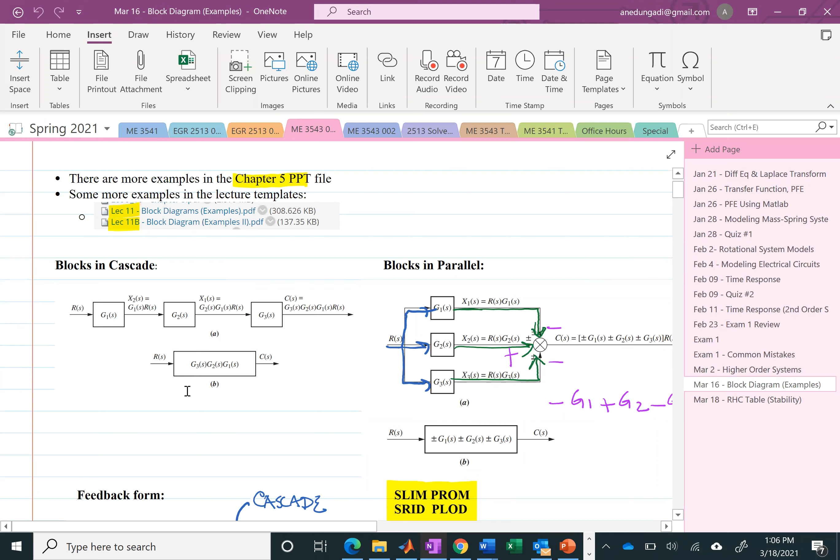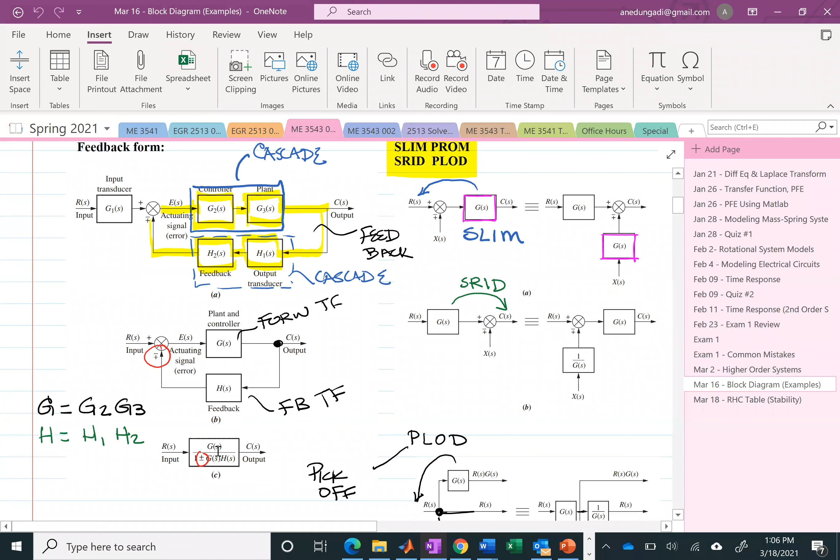We determined the equivalent transfer function of that multi-block system, right? That's what we did. If you look at the examples that we did last class, if you have these multiple blocks, then the equivalent transfer function is this. If you have multiple blocks arranged in this form, then the equivalent transfer function is that. So what does that do for you? From the multiple blocks, you get one total transfer function. That's why we called it the total transfer function, T.

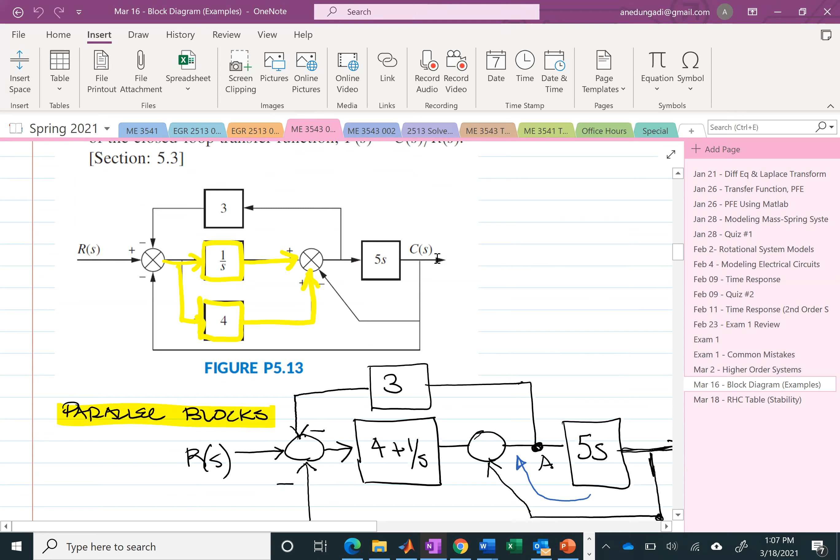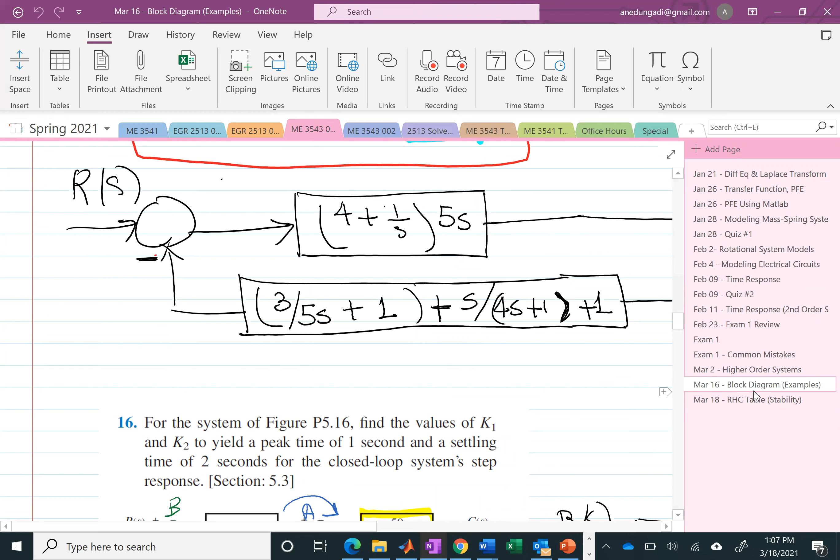Again, this is multiple blocks, right? You have a transfer function, then you have the unity feedback. That's also a transfer function. And we determined the equivalent transfer function by moving blocks or recognizing one of the three: cascade, parallel, feedback, and then determined our total transfer function. So this total transfer function is the equivalent of this multi-block transfer function. Everybody sees that? Here we were able to determine a total transfer function between the input R and the output C. That's going to be important for the next chapter, which is stability.

Now, let me just say this. The stability of a physical system, of a dynamic system: if we have a static system, that static system is not moving, so there's no question about stability. Stability only comes in when you have a dynamic system. And when you put an input into that dynamic system, if its output is stable, then you have a stable system.

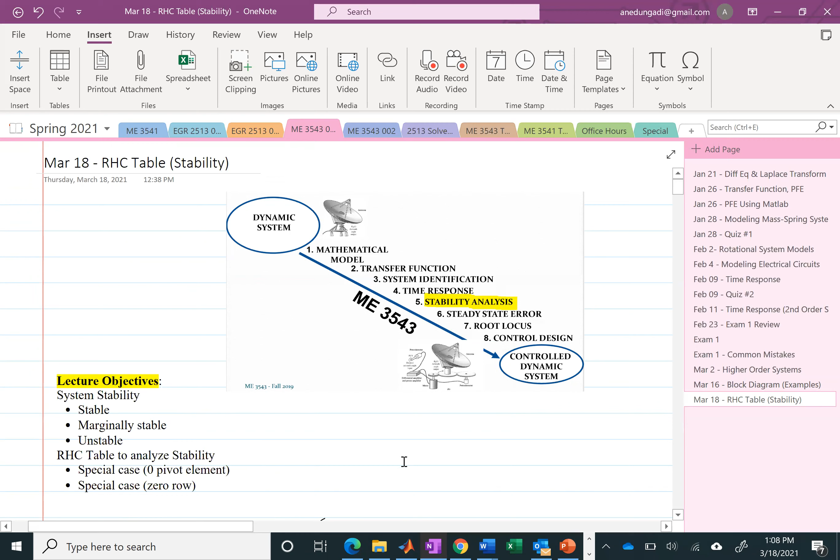Stability comes in three flavors: stable, marginally stable, and unstable. What does stable mean? Let me show you this physical representation of stable. This is asymptotically stable. I'll get to stable in a minute, but let me define stable as this.

Stable would be, let's say we have a surface and we have a car, and then someone puts a force on that car. That force can come from the engines, or it could be coming from multiple people pushing the car. But what happens is that car will move from its initial state and it will go to a different state, right? Different position. And it will just stay there, right? So it goes from position 1 to position 2. So this is what I would call stable.

Okay. Now, what happens if, instead of a level plane, I were to tilt this ground? And then again, the same car, you push it for a certain amount of time, and it goes to a different location. Now, when you take the force away, what happens to the car? It's going to roll down. So that's an unstable state. Okay. So that's the concept of stable and unstable.

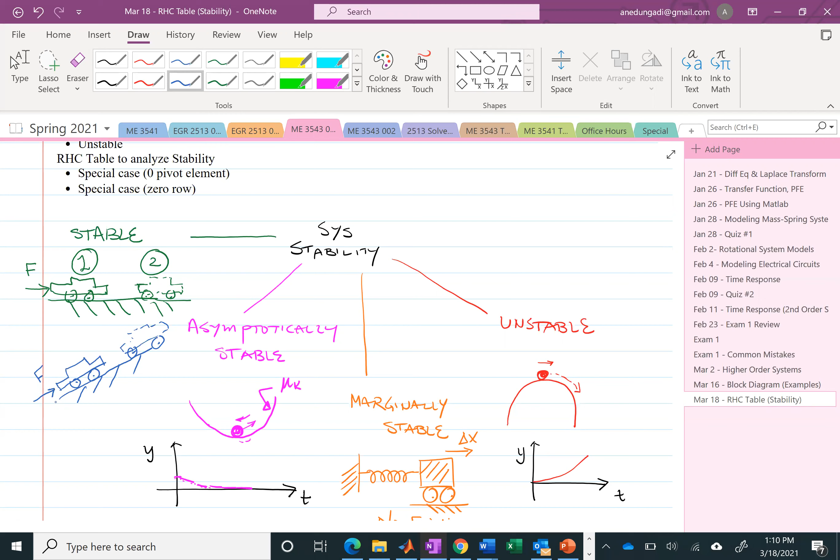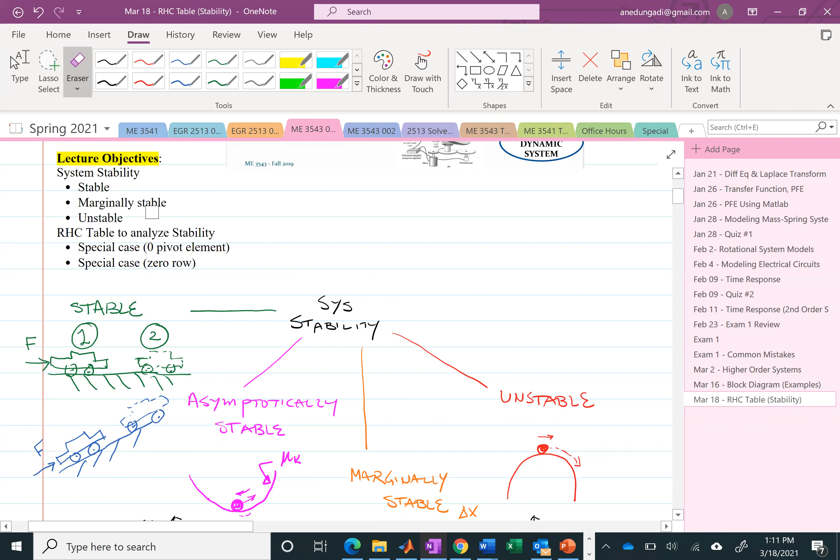Now, what I've done for you is I've basically taken these three flavors of stability: stable, marginally stable, and unstable. These are the three flavors that we're going to be studying in this chapter. So unstable is what we just talked about, or if you look at an inverted trough, and you have a little marble or a little sphere at the top of this trough, if you didn't do anything to that sphere, it would just stay there forever, right? It would be stable and stay there forever. However, if you perturb the position of this object by an infinitesimal small amount, what's going to happen? It will never return to its original state. It will just basically run away. Exactly like this thing here. If you leave the car here and take the forces away, this car is going to roll down.

So that's unstable. Marginally stable is if you have a constant oscillation of the system once you apply a force to it. So if you have a mass spring system, what happens to that mass if you apply a force F and compress the spring and let that force go away? What happens to that mass? Let's assume there's no friction. So you compress that spring for a certain amount, and then you let that mass go. What happens to that mass, do you think? Exactly. It's going to oscillate forever. Exactly right. Oscillate in a sinusoidal manner. It's going to oscillate forever. So that's what we call marginally stable.

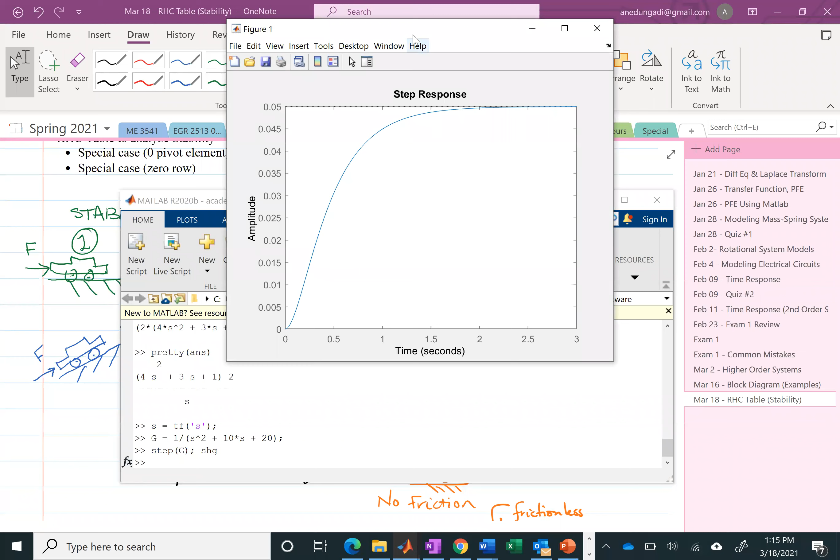Okay. So let me show you what it looks like in a simulation. Okay. So let's say the transfer function. I'm going to say S is equal to TF of S. I'm going to say the transfer function G is 1 divided by S squared plus 10S plus, I don't know, I'm just completely making this up, 20. Second order transfer function, if I put a step input into this transfer function G, what do I get? Okay, there you go. So put a step function into it, and it basically goes to a different location, just like your car, right? You pushed on this car and it went to a different location, and it just stays there.

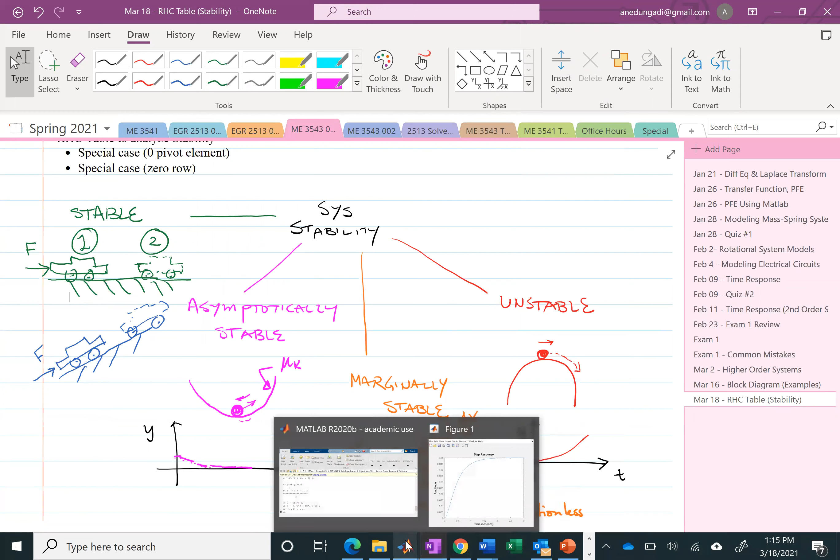Now, what happens if I say G, a different transfer function, 1 divided by S squared plus 20. So I'm basically removing the damping, making this no friction. Hold on, grid. Now, what do you think will happen if I were to put a step input into it? Aha, it just oscillates forever, right? Let's zoom in a little bit.

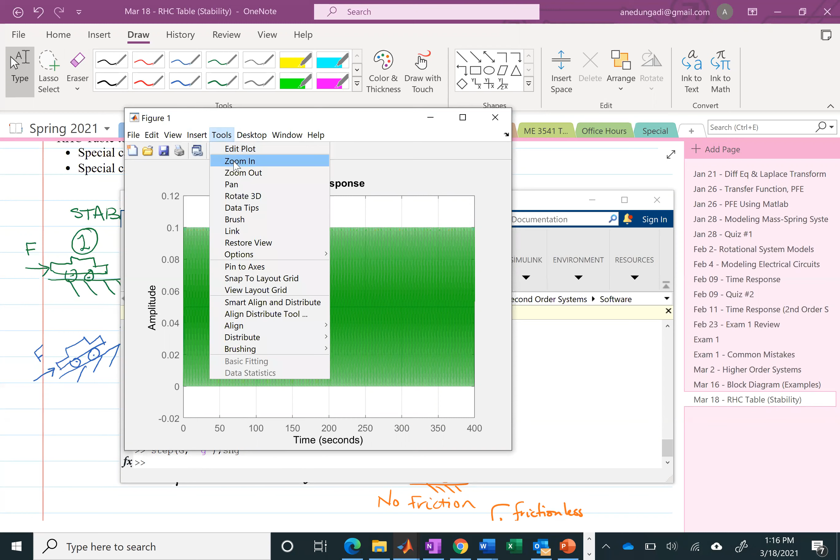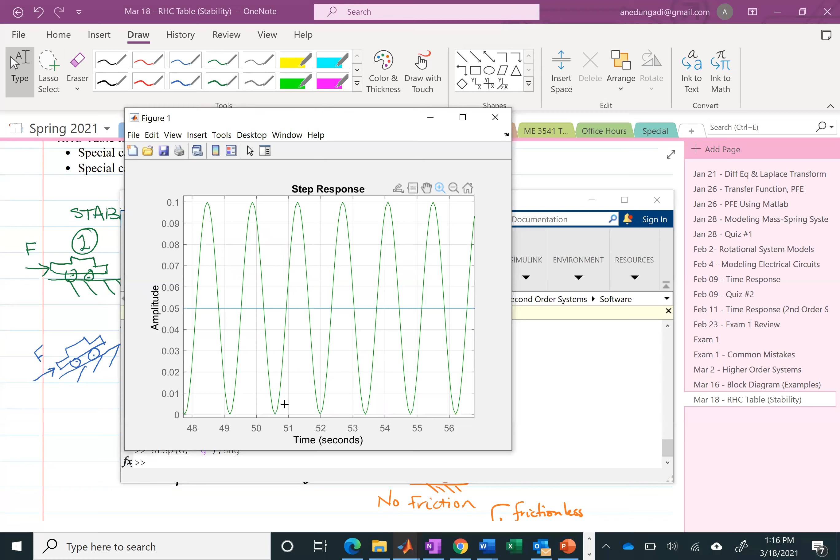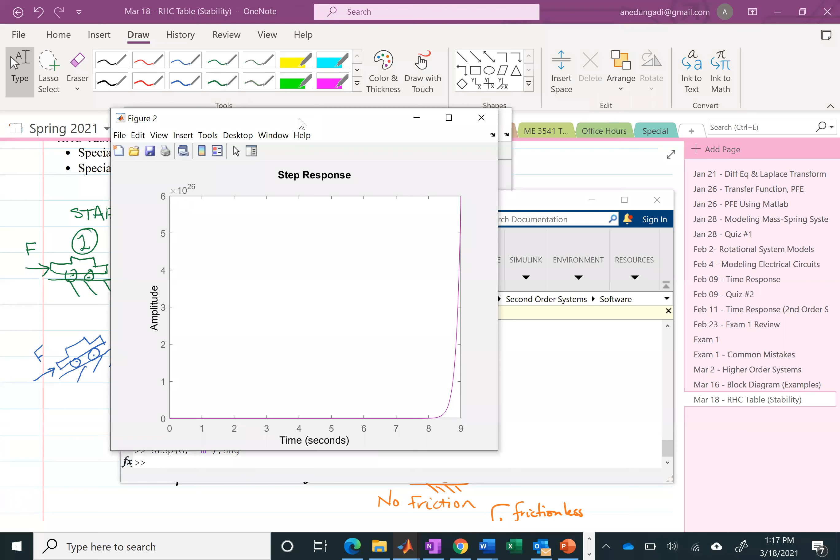There, it's oscillating forever. So that's a marginally stable system. And an unstable system, make this negative. New figure, step G, make that magenta. Aha, you see what happened? The system goes to infinity. Basically, it has run away. So that's an unstable system.

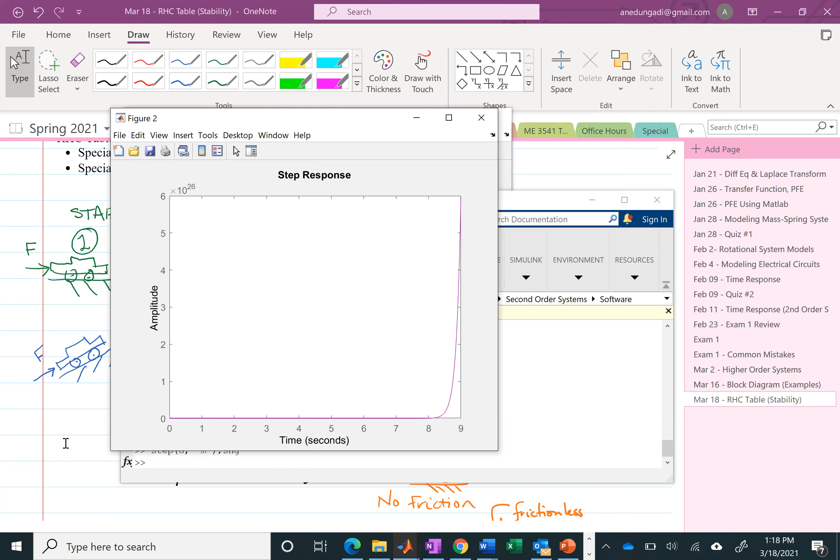So if you put a bounded input, a step input, into the system, and if the output is bounded, then we have a bounded input, bounded output, stable system. If you put a bounded input into a system and the system basically runs away, meaning the output of the system goes to plus or minus infinity, then we have an unstable system. Okay, so now I want to give you the tool to determine stability. How do you determine stability? If I have the transfer function, does anybody remember what characteristic of the transfer function indicates stability?

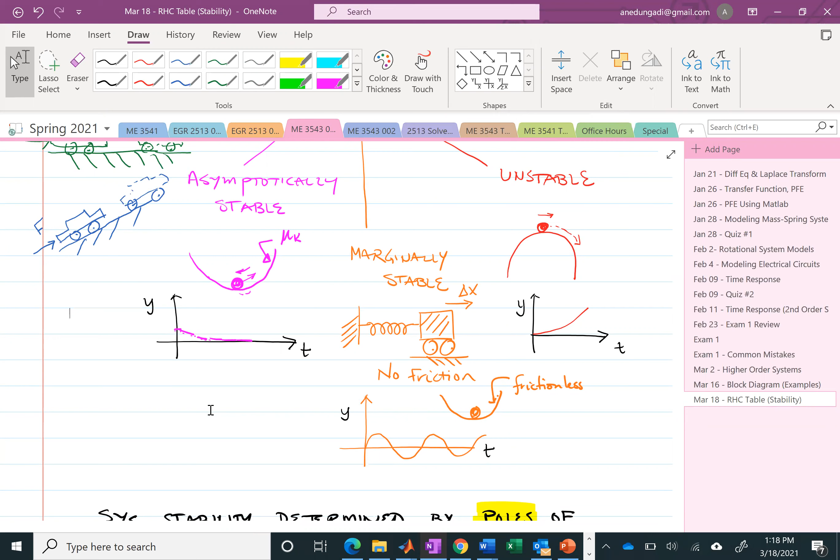So the system stability is determined by the poles of the total transfer function. Not the forward transfer function, not the feedback transfer function, but the total transfer function. So the poles of the transfer function, what are the poles of a transfer function? Anybody know what the poles of a transfer function are? We did this for exam 1. The roots of what, Tony? There is a numerator and there's a denominator. The roots of what? Exactly, the roots of the denominator. What are the roots of the numerator? Those are the zeros, exactly. So the poles of the total transfer function. So remember, please, it's the total equivalent transfer function.

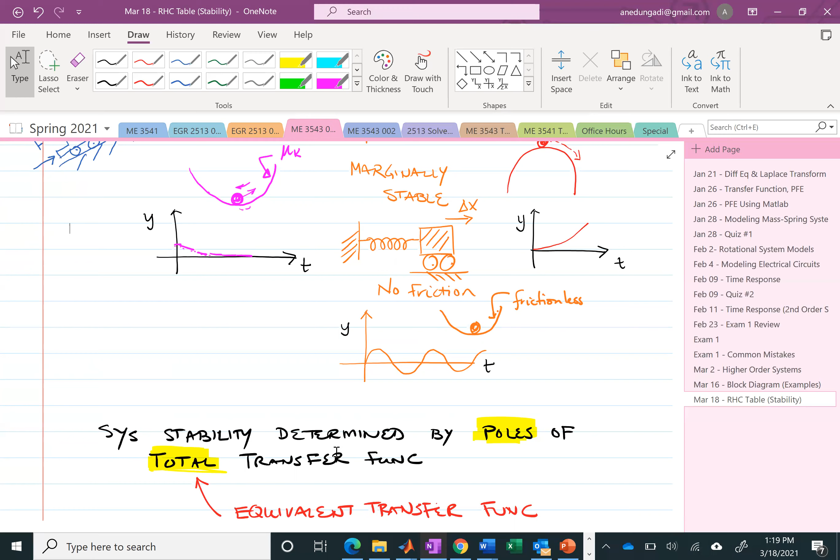That will determine if you have an unstable system, a marginally stable system, or a stable system. So if all the poles are on the left-hand side of the s-plane, then you have a stable system. If you have a pair of poles on the imaginary axis, you have a marginally stable system. And if you have any pole on the right-hand side, that becomes an unstable system. So the rightmost pole determines the system stability. In other words, you can have a million poles on the left-hand side, and if you have a single pole on the right-hand side, that single pole will determine the stability of the system.

You can have a million poles on the left-hand side, but if you have two poles on the imaginary axis, then those are the two rightmost poles, and they make the system marginally stable. And again, you can have a million poles on the left. If you have a single pole on the right, that makes the system unstable. Okay, so let's look at our example again. Remember, the original example was this, right? And when I did a step input, was that stable or unstable? Do you remember? It was stable. Exactly right.

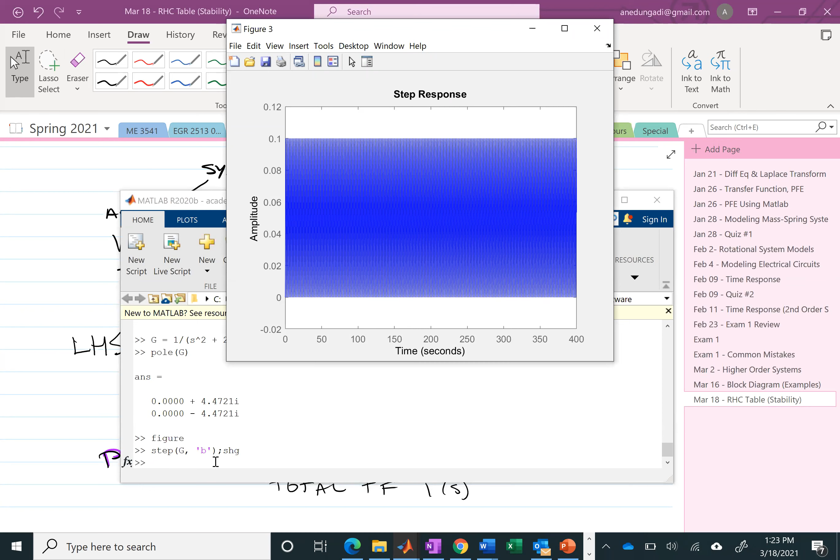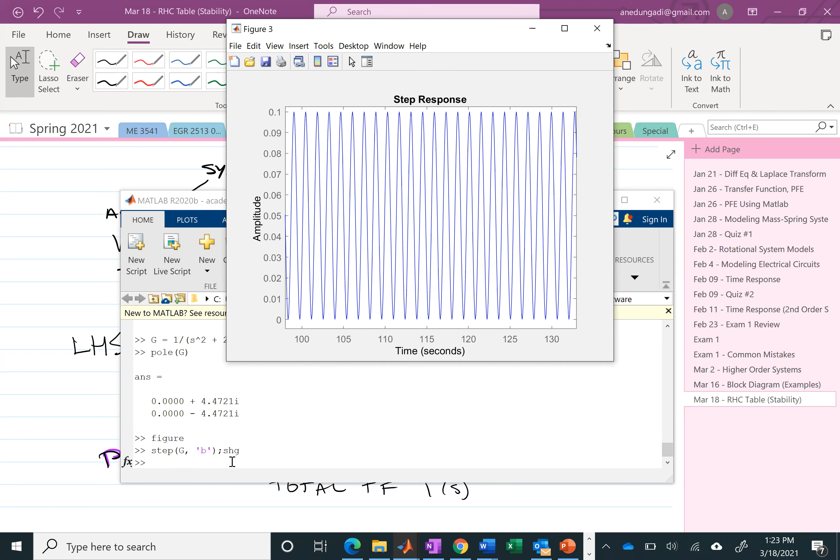It was stable. And how do I know that? Well, if I say G is equal to that, let me just do the pole of G. Okay, so the poles of G are at negative 7.2 and negative 2.76. So the poles are on the left-hand s-plane, and therefore the system is stable. What about G being this? The poles are on the imaginary axis. And you remember what happened when I put a step input into this transfer function? Figure, step G, make that blue. Oscillations, right? And the poles of that transfer function are on the pure imaginary axis.

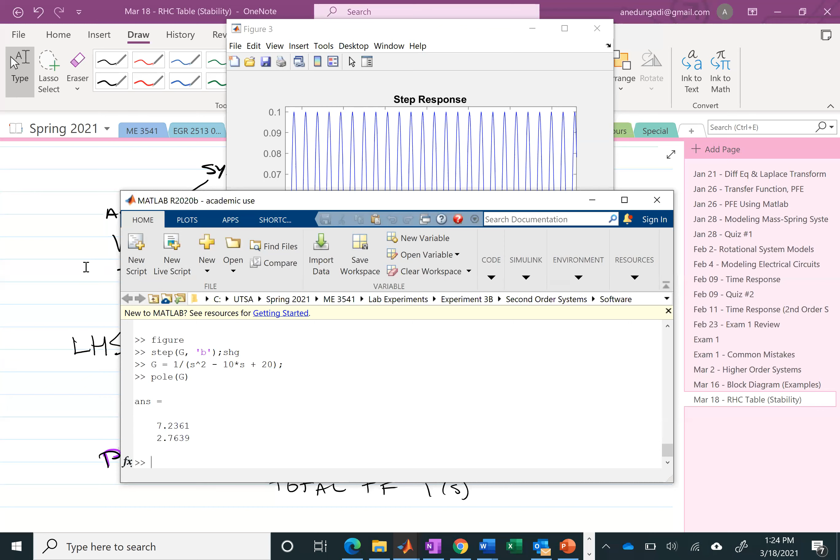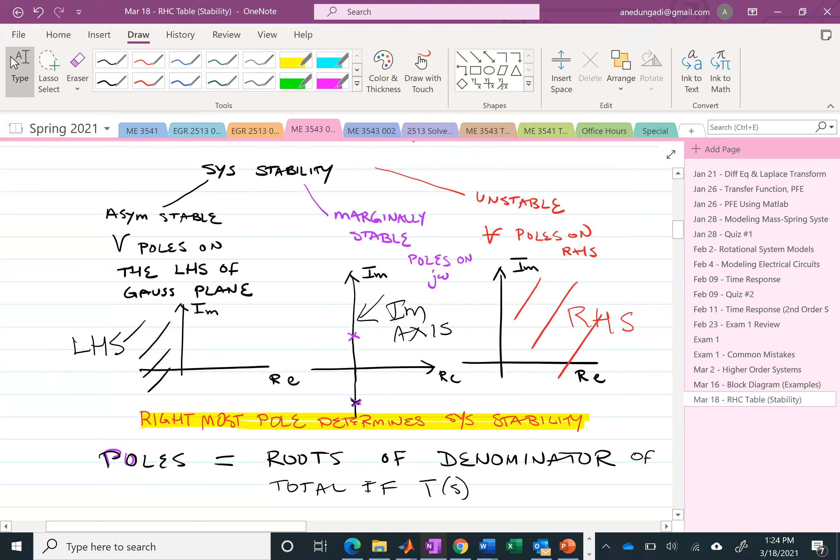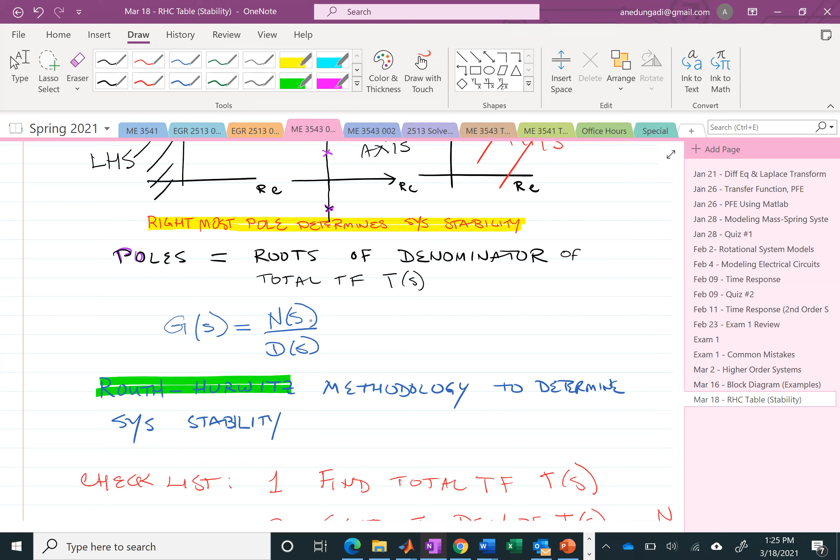And then we looked at this transfer function, right? No, this one. What was this? Stable, marginally stable, or unstable? Well, let's look at the pole of G. Positive and positive. So that means two positive poles makes it unstable. Okay, so the poles are the roots of the denominator of the total transfer function. So the roots of the denominator of the total transfer function determine the stability of the system. Now, roots means you have to solve for the roots of the denominator, right? So remember, G of s is numerator over denominator. So the roots of the denominator tell you whether you have a stable system, a marginally stable system, or an unstable system. Again, please remember this.

Stable system, all the roots are to the left of the imaginary axis. Marginally stable system, you have poles on the imaginary axis. You can have two or more poles on the imaginary axis. And unstable means that you have at least one pole on the right-hand side. Remember, the rightmost pole determines the system stability. Okay, so what happens if this is complicated? Let's say this is 1 divided by, let's look at the example that we're going to do. Let's say this is 1 divided by s to the power of 4 plus 3s cubed plus 2s squared plus 4.

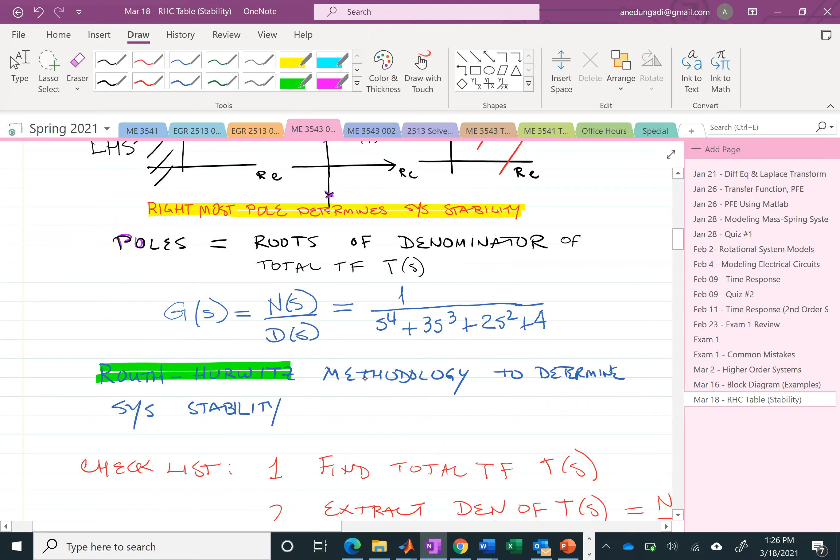So you cannot manually calculate the poles of this fourth order transfer function, right? You would need MATLAB or some other analytical tool to calculate the poles of the transfer function. So instead of calculating the poles of the transfer function, there is a method called the Routh-Hurwitz method to determine system stability. And let me show you how that works. So for the Routh-Hurwitz method, here's my checklist. Always first find the total transfer function.

Now, what is finding the total transfer function? It's what we did in chapter 5. So you have a multi-block system. You have to determine the total equivalent transfer function. Once you have the total transfer function, extract the denominator of the total transfer function. Write out the denominator without any vanishing exponents on S. I'll explain that in a minute. And then create the RHC table.

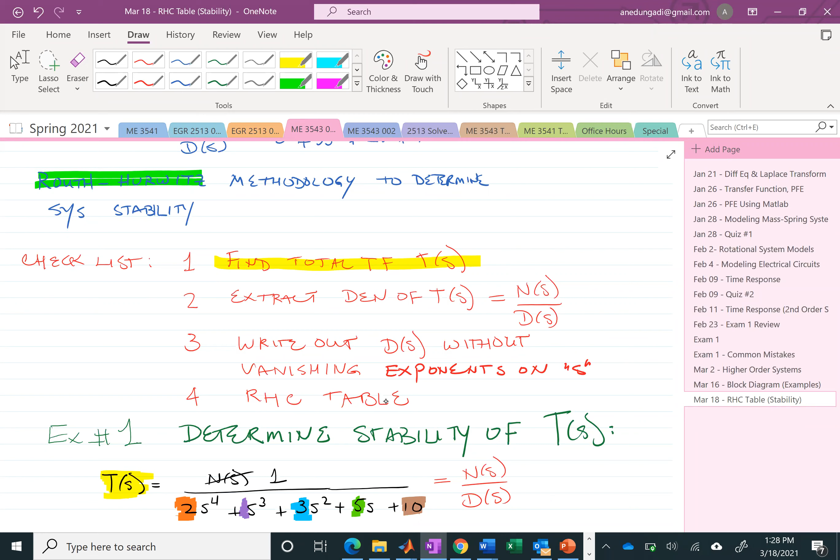The RHC table will tell you whether you have a marginally stable system, an unstable system, or a stable system. So stable, unstable, and marginally stable. That's what the RHC table will tell you. Okay, so let's look at an example.

1 over this polynomial that we have at the bottom. A fourth order polynomial, so practically impossible to determine the roots of that polynomial. Usually anything higher than 2, it's very difficult to determine the roots. So how does this RHC table work?

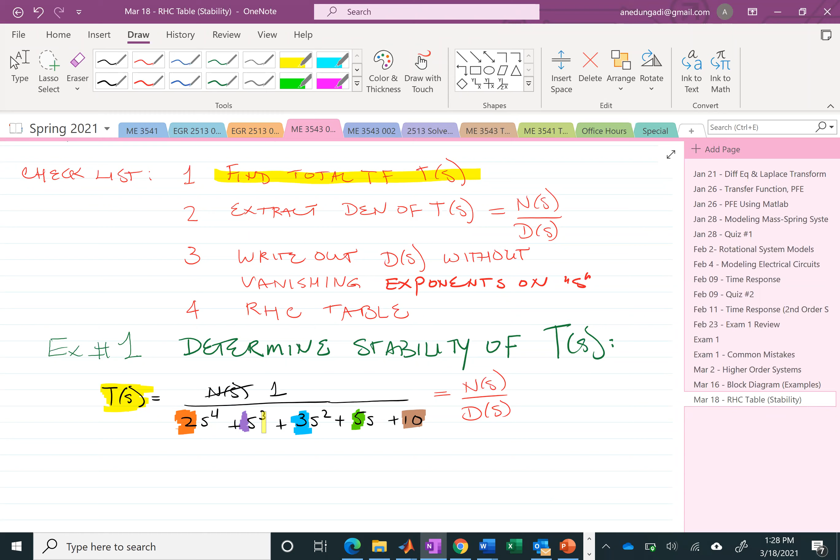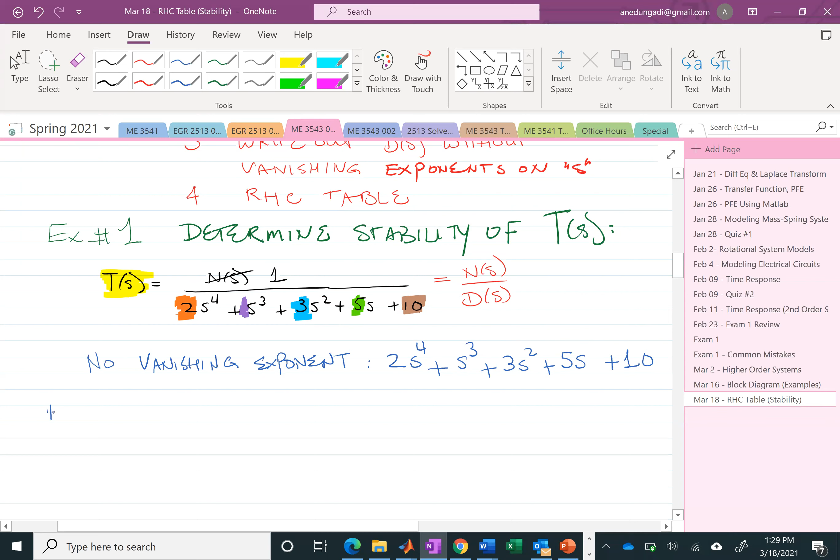So this is how it works. The first thing that you would do is look for any vanishing S exponents. So you have S4, S3, S2, S, and S to the power of 0. So there are no vanishing exponents. So we have 2S to the power of 4 plus S cubed plus 3S squared plus 5S plus 10. Now what we do is we start off, this is the RHC table. We start out with the highest exponent in S. So that's S to the power of 4, S cubed, S squared, S to the power of 1, and S to the power of 0.

Okay, so for the first row, you take the even coefficients. S to the power of 4, you put the 2 over here. That's the same 2. Then you skip the next one, go to the s squared term, which is 3. Then you skip the 5s and go to 10. This is just a method, so just follow me on this method. S to the power of 4, because that's the highest exponent, then 4, 3, 2, 1, 0. That's your first column. Second column, take s to the power of 4, and which coefficient is that? That's 2. Skip 1, go to 3. So basically, only take the even coefficients.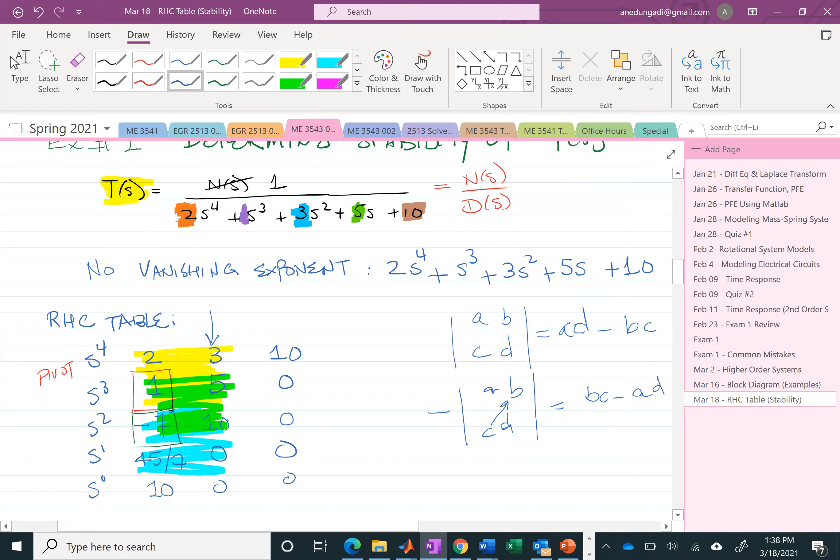Okay. So there's the RHC table. The next thing that you have to do is check for sign changes in the first column. The number of sign changes in the first column will determine the number of poles on the right-hand side. That's the beauty of this methodology.

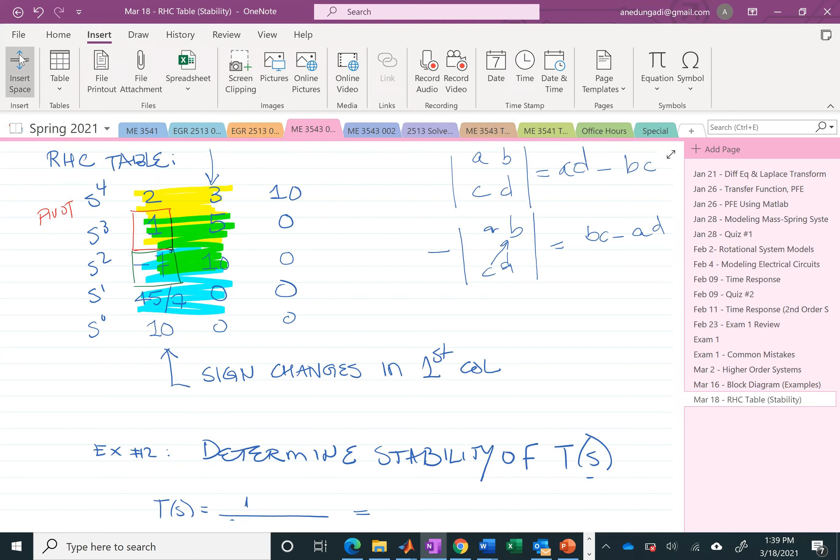Okay, so again, how many sign changes do I have? So let me write this out in red. Number of sign changes in the first column is equal to the number of right-hand side poles. Oh my God. It took it too far. The number of right-hand side poles.

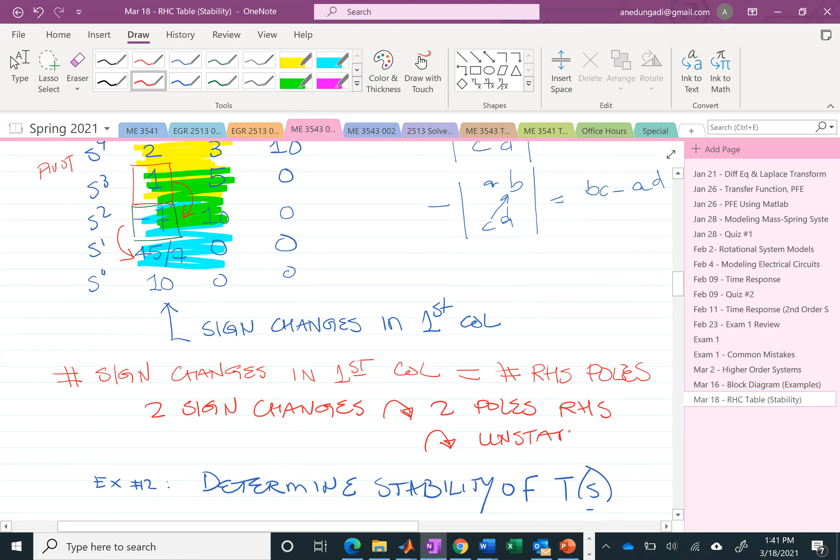Okay. So let's look at the number of sign changes in the first column. I have one sign change from 1 to -7, and then I have another sign change from -7 to 45 over 7. So this particular transfer function has two sign changes. Two sign changes, therefore two poles on the right-hand side, therefore this system is unstable.

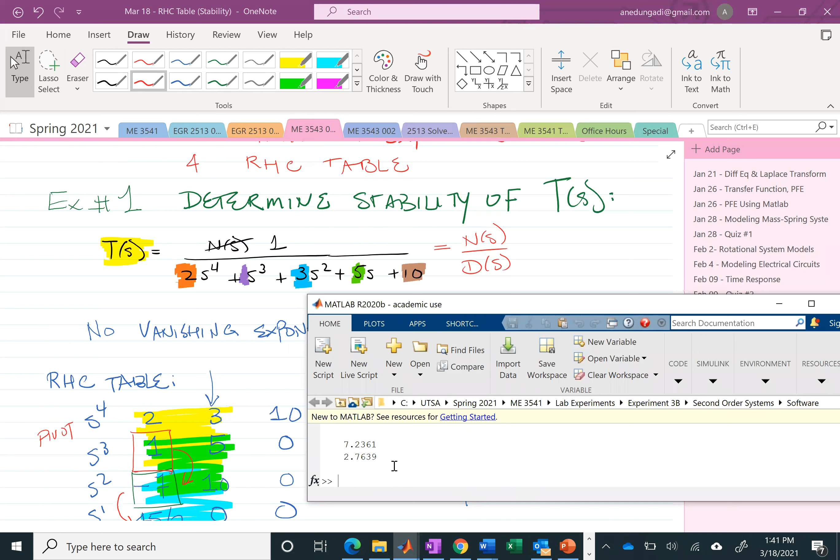Let's quickly verify that in MATLAB. Again, I encourage you to verify your work in MATLAB. Use MATLAB to verify your work. So let's write this out. Okay, so G is equal to 1 divided by 2s to the power of 4 plus s cubed plus 3s squared plus 5s plus 10.

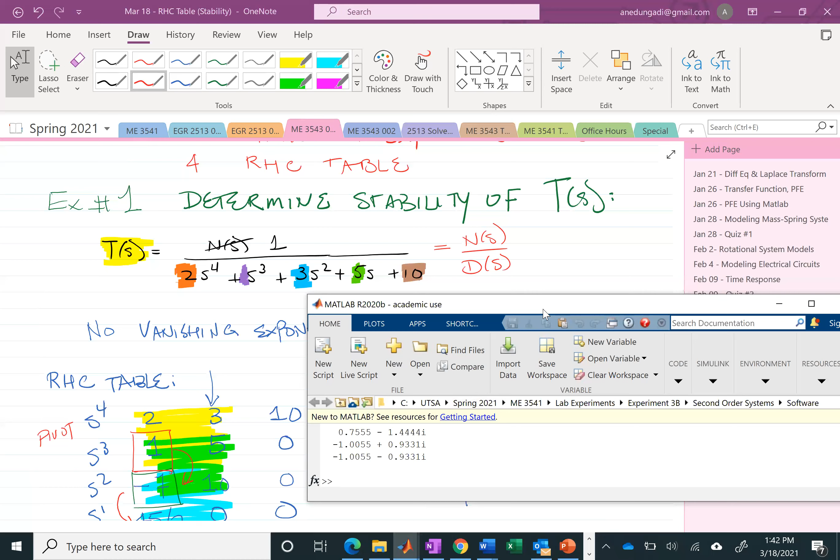Okay, now if I do a pole on G, see, these are the two right-hand side poles. It's s to the power of 4, so it has four poles. So two poles are on the right, two poles are on the left. Is that clear to everyone?

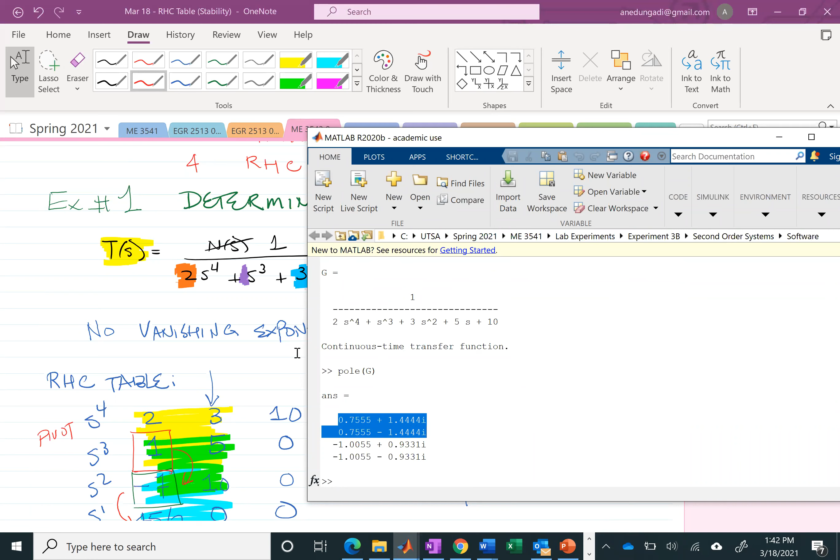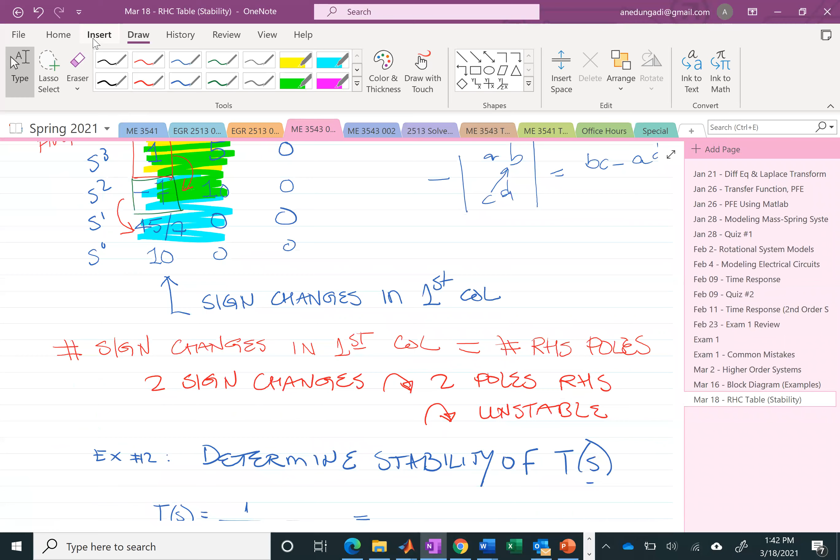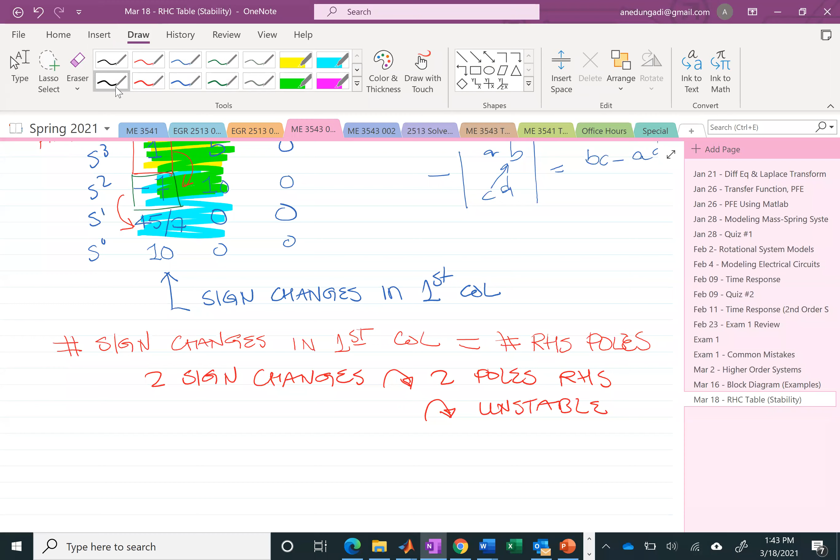Okay. Now, the RHC method doesn't tell you what the numerical value of the poles are. All it tells you is that there are two poles on the right-hand side. So if there are two poles on the right-hand side, then the total number of poles must equal 4, therefore two poles on the left-hand side. So again, if you were to draw it out, two poles on the right-hand side, and therefore two poles on the left-hand side.

Now, these two poles could be on the real axis. These two poles could be on the real axis too. We don't know that. But from a stability point of view, we don't really care. All we care is, do we have any poles on the right-hand side? And that's what the RHC table tells you. Okay, good. Please feel free to interrupt me at any time if you have a question.

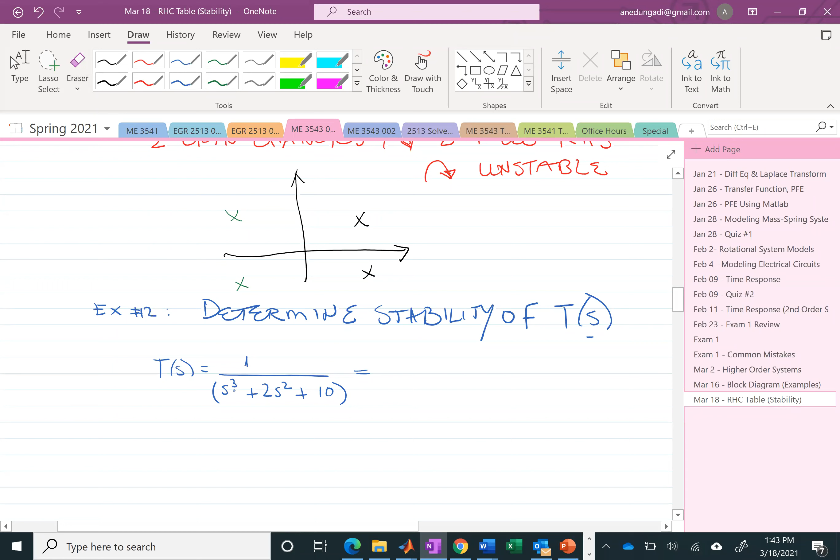Okay, so here I'm confused on that one. Okay, so what is it that you're confused about, Emir? Question, Emir? So in order for it to be stable, there has to be 0 right-hand poles. That is correct, Crystal. No right-hand poles whatsoever. If we have 4 poles, which one do we focus on? Okay. So in this chapter, we're not going to be focusing on any pole as such. All we're going to try and determine is, do we have any poles in the right-hand plane? If we even have a single pole on the right-hand plane, we know the system is unstable.

Amir, is that clear? Is it only for determining unstable, marginally stable, or stable? That's exactly right. The RHC table will only tell you if the system is unstable, marginally stable, or stable. So if there are any poles on the right, it's automatically unstable. That is exactly right, Amir. Any poles on the right, the system becomes unstable. Now, again, I'm glad you asked that. You can have a million poles on the left, right? A million poles on the left, system is completely stable. But if the million and one pole is on the right, that whole system just became unstable. Emir, is that clear?

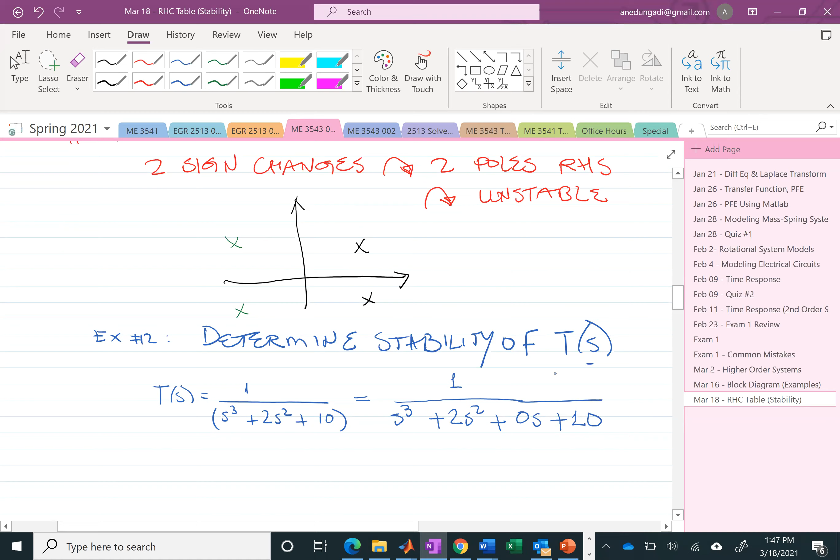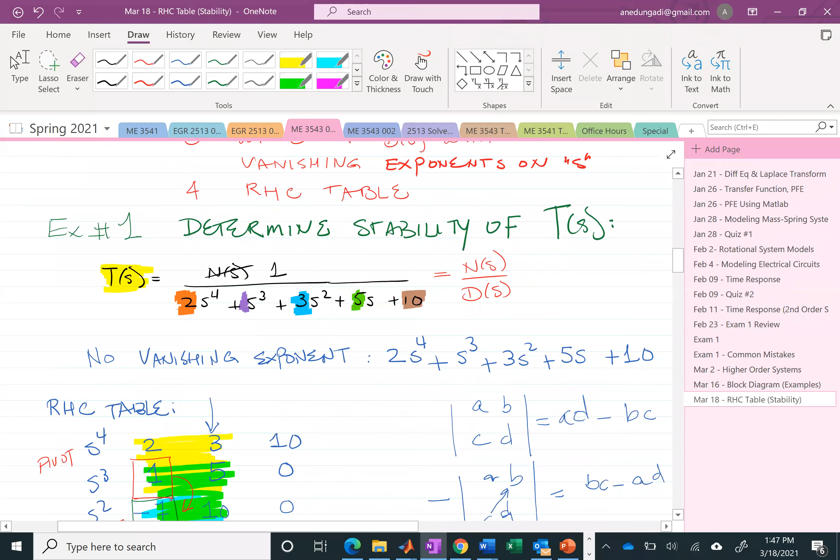Okay, so let's look at another example. What do you notice in this example? There is a vanishing s exponent, right? So this is s cubed plus 2s squared plus 0s plus 10. Remember my checklist: write out d of s without vanishing exponents on s. So I've written it out without vanishing exponents. I have s cubed, s squared, s to the power of 1, and s to the power of 0.

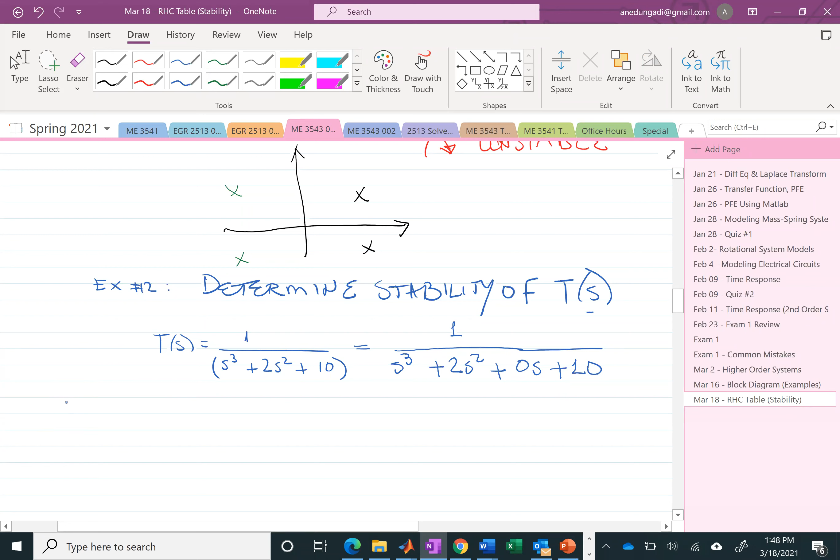Actually, let me make sure that I don't make a mistake. I start out with s cubed, s squared, s to the power of 1, and s to the power of 0. Okay, so s cubed, 1. I skip the next one, go to 0. I skip the next one, go to 0. s squared is 2. I skip the next one, I go to 10. And 10, I skip the next one, I go to 0. So you can pad the denominator polynomial with as many zeros as you want.

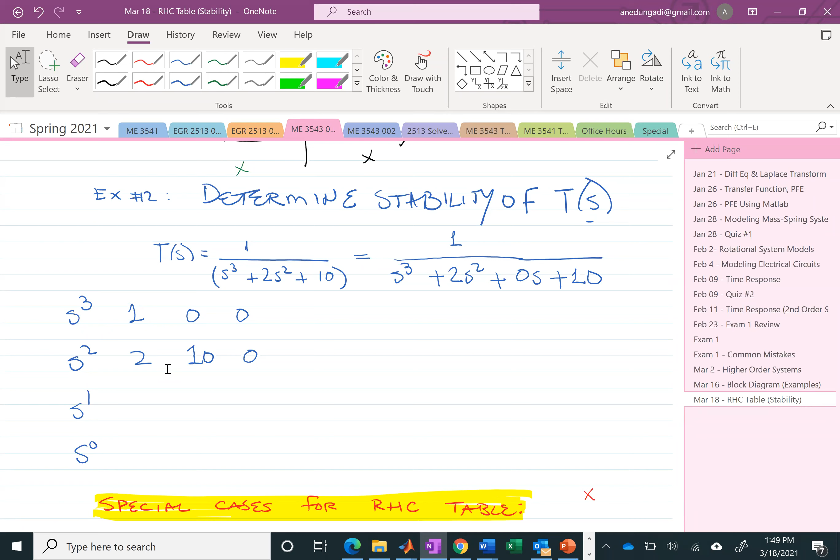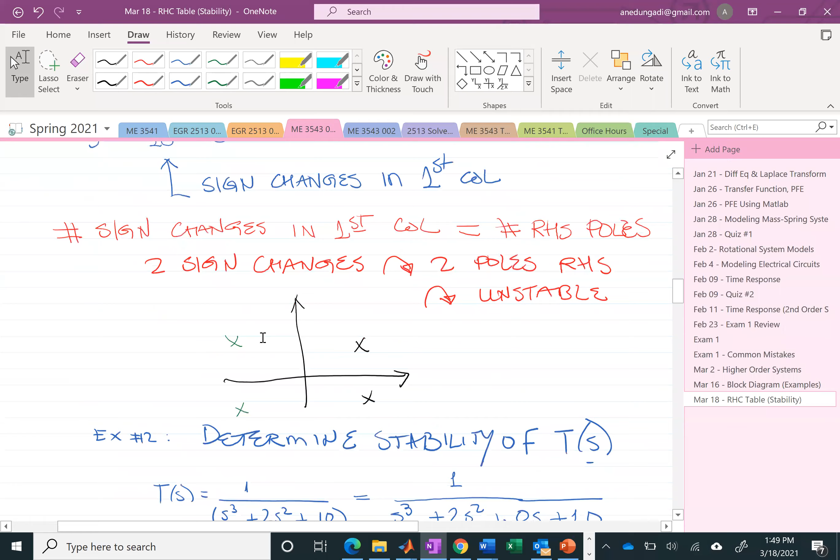Now I'm ready to, is there always 3 columns? Crystal, what do you mean? There are 4 rows here. Oh, is that what you mean, that is there always 3 columns? No, not necessarily. In this example, we also had 3 columns, but the number of columns depends upon how many coefficients you have in the denominator polynomial.

Okay, so let's look at the RHC table for this transfer function. So that is 2 times 0, the negative determinant of this matrix here, where this is the pivot. So what is the negative determinant of this matrix? Negative 10, correct, divided by the pivot 2, that gives negative 5. Then I skip this column and go to the next one.

So the first column stays the same. I skip the next column and go to here. What is the determinant of that matrix? 1, 0, 2, 0. The determinant is 0. Exactly right. Very good. 0 divided by 2, that is 0. And the next one is also going to be 0, because we can add as many zeros as we want without changing anything. So skip this column and go to this one. The determinant is still 0. Okay. So far so good.

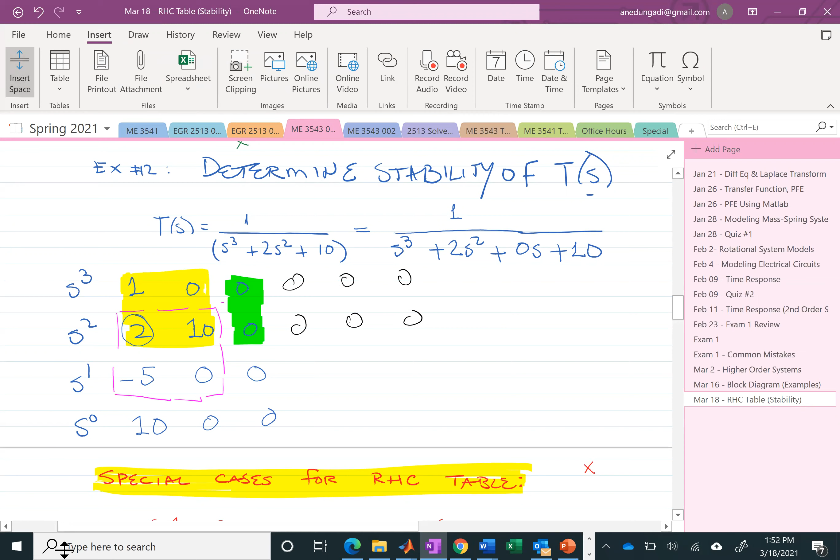Okay, one more time. You understand how I got the rows for s cubed and s squared, Emir? Okay, good. Now the s to the power of 1 row: take the two rows above it. So the two rows above it are 1, 0, 2, 10. The negative determinant is 2 times 0 minus 10, so negative 10. Negative 10 divided by the pivot. The pivot element is always the bottom left corner element of the first 2 by 2. So negative 10 divided by 2, that's negative 5.

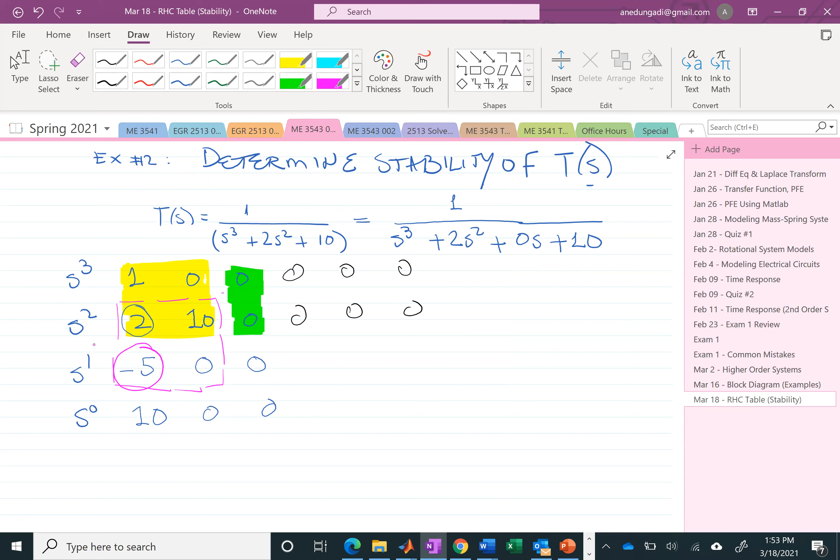Then for this row, I skip this column. The pivot on the last one was negative 5. Yes, the pivot on the last one is negative 5. That is correct. It's always the bottom left element that becomes the pivot. Good. These are all great questions. I know you're seeing this all for the first time, so all your questions are valid. Please stop me at any time and ask me as many questions as you want. I'm always happy to answer those questions for you.

Okay, so now we're done with the RHC table. We can get rid of these zeros. They don't really mean anything. So there's the RHC table. Now I look for sign changes in the first column. I have a sign change here from 2 to negative 5, and then another sign change here from negative 5 to positive 10. Therefore, I have two sign changes. This system is unstable.

Unstable system. Again, I can verify that with MATLAB. G is equal to s cubed plus 2s squared plus 10.

How many poles do you expect this total transfer function to have? Anybody, how many poles do you expect this total transfer function to have? Exactly right. Three poles. Very good. Because it's a third order system, right?

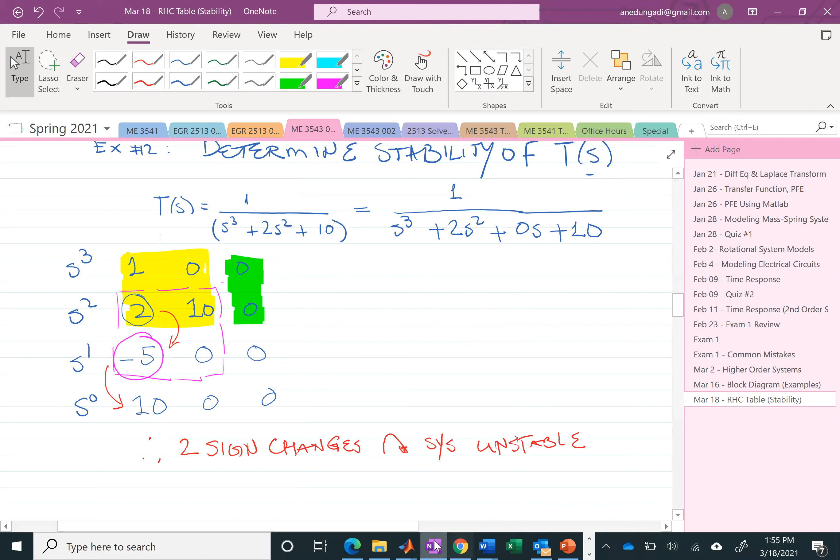So if I do a pole on G, oops, what happened? Oh, this is not the transfer function, right? It's 1 over that. So G is equal to 1 divided by that. There are your three poles.

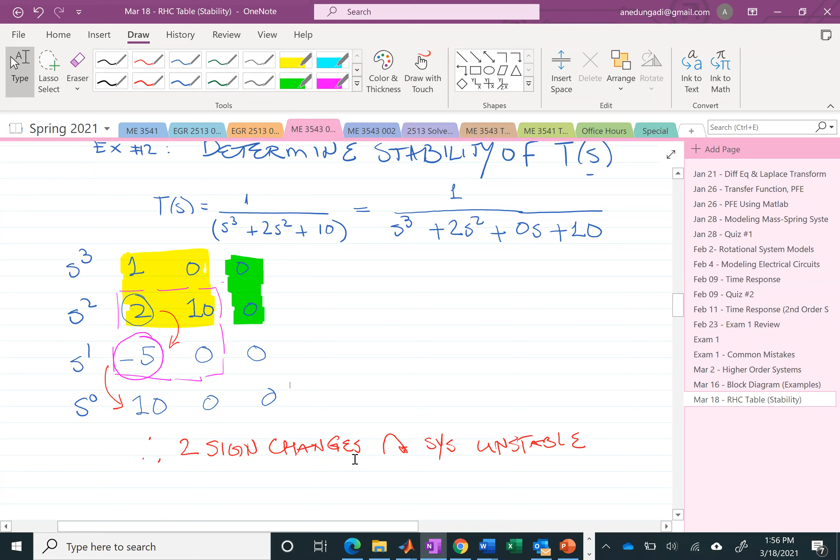Look at the first pole. The first pole is at negative 3.06, 0i. Look at the second two poles at 0.53 plus minus 1.73i. And that's what the RHC table predicted. Two sign changes, therefore two right-hand side poles, and therefore the system is unstable.

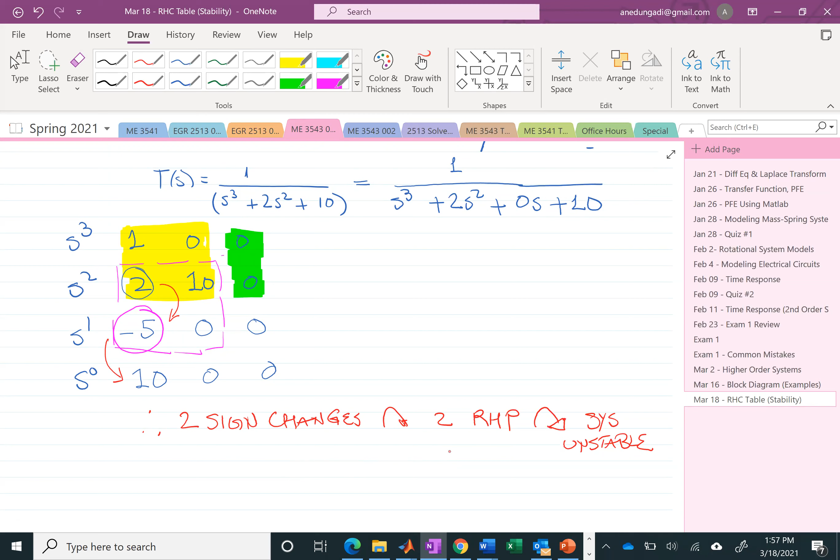So for a control engineer, that in itself is a big thing, to be able to determine the stability: stable, marginally stable, or unstable. Any questions? Okay, so now we're going to come to the special cases.

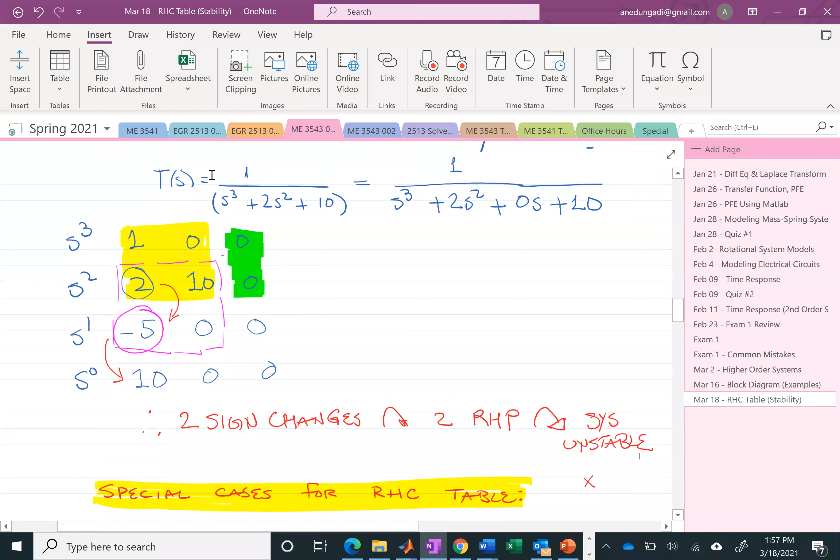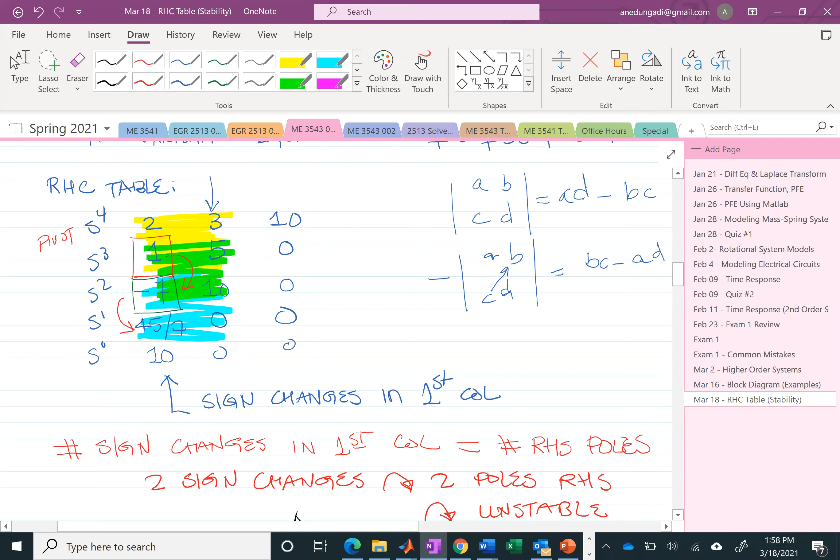Okay, so remember this pivot, right? What is the pivot again? The pivot element is the bottom left corner of the 2 by 2 matrix. So in this case, it was 2, then it became negative 5, and so forth. For this case, it was 1, and then became negative 7. Does that make sense to everyone? Is that okay?

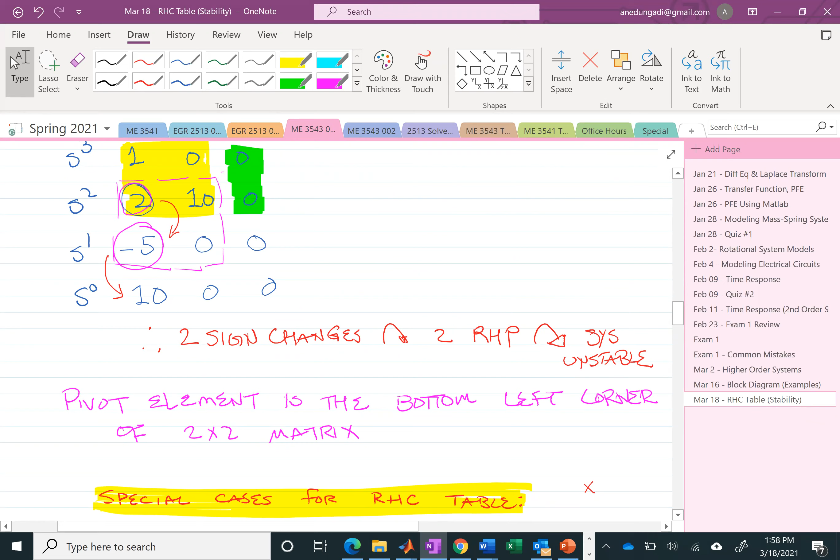Now, if the pivot element itself is 0, is there a problem? What problem do you see if the pivot element is 0? You're dividing by the pivot element, right? And therefore, division by 0 is an illegal mathematical operation. Therefore, the Routh-Hurwitz table has a workaround for a 0 pivot element. Replace the pivot element by a small positive epsilon. Once you replace it, complete the RHC table using that epsilon and then check for sign changes. I'm going to give you an example.

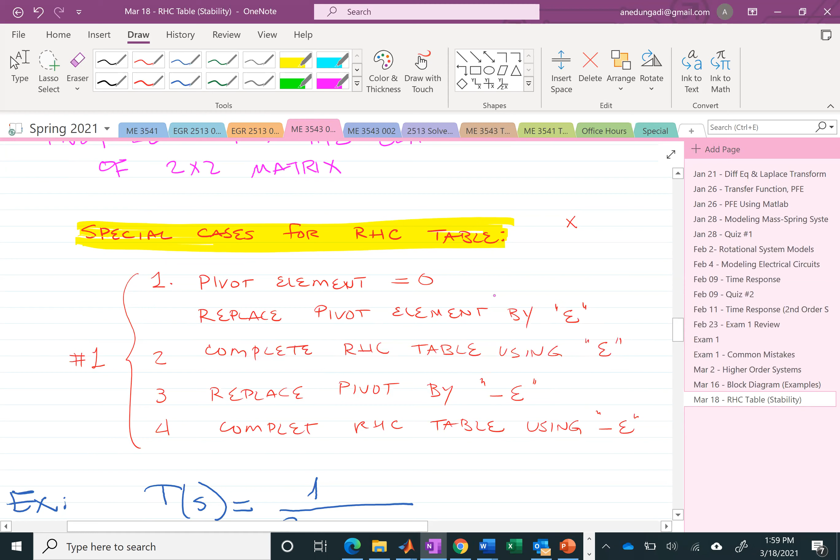Okay, so there's an example. Immediately, what do you see from this total transfer function? Exactly right. We are missing an s squared. Vanishing s exponent, missing an s squared. So I'm going to write it out with the vanishing term. We have s cubed plus 0s squared minus 3s plus 2. Okay, so let's put some space here.

Okay, so go ahead and start with the highest exponent: s cubed, s squared, s to the power of 1, s to the power of 0. S cubed is 1. Then I skip the next one, I go to negative 3. And then I skip 2 and I go to 0. S squared, I have 0, 0s squared. Skip the minus 3s and then I go to 2.

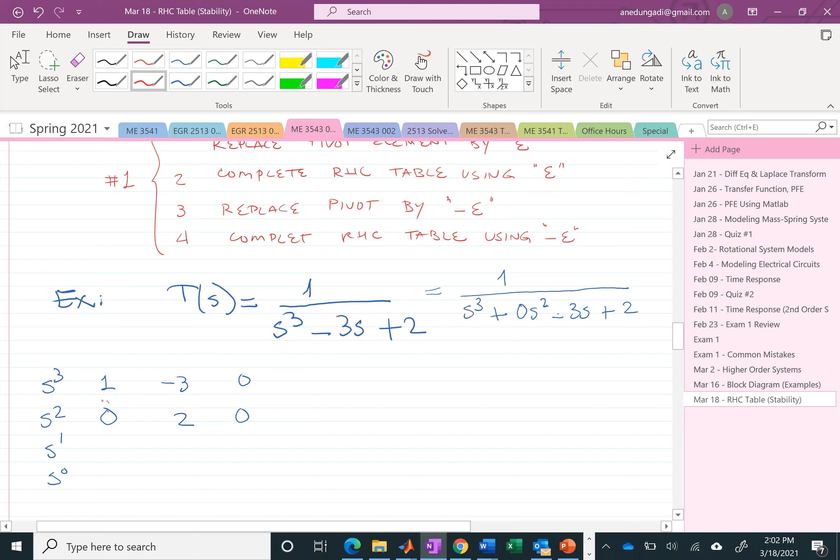Okay, so this is my pivot, correct? The bottom left corner of the 2 by 2 matrix. So that's the pivot. Obviously, there is a problem. So I replace this with a small epsilon. Okay. Now, what do I have?

Okay, so what do we have? What is the negative determinant of this matrix here? Negative 3 epsilon minus 2 divided by epsilon. Negative 3 minus 2 divided by epsilon. That's exactly right. Then let's move this a little bit over here. I skip this next column and I go to the next one here. So what is its negative determinant? 0. 0, right?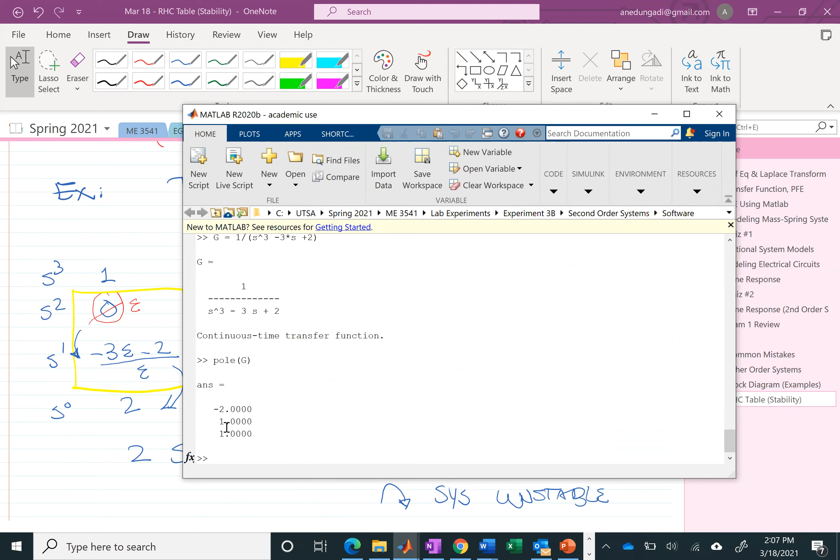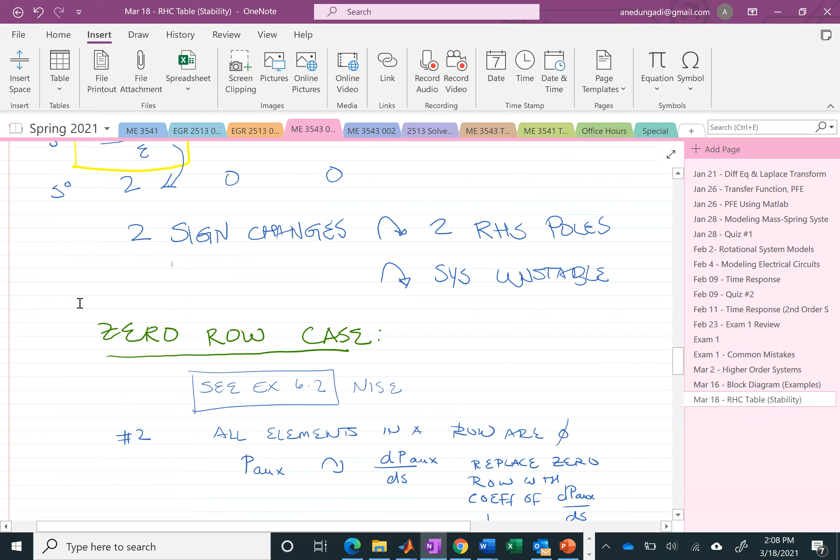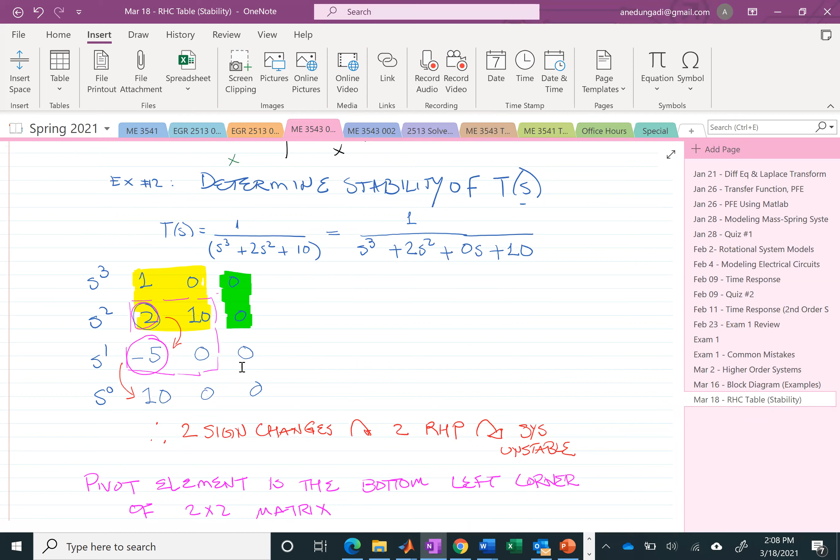Okay. Maybe it's not a good idea to go to the next material. What I want to do is make sure that you have understood the special case of a zero pivot and the general, non-special RHC table. Any questions? So again, if you have a zero pivot, replace the pivot with a small positive epsilon and carry out your RHC table. Then you're supposed to also replace it with a small negative epsilon and complete your RHC table. But what you get from step 2 and step 4, the conclusions are going to be identical.

So do we keep adding columns until the first row hits a 0? Okay, Veronica had another question. Can you explain why the last row, first column is 2? Last row, first column is 2. Okay, yeah, good question. Anthony, I'll get to you in a minute.

So, last row, again, this is the negative determinant of this matrix here, right? So what is the negative determinant? Well, this multiplied by this minus 0. Veronica, do you see that? It's this multiplied by this minus 0, divided by that, so 2 times this expression here, negative 3 epsilon minus 2 over epsilon, divided by the pivot, negative 3 epsilon minus 2 divided by epsilon, makes it 2.

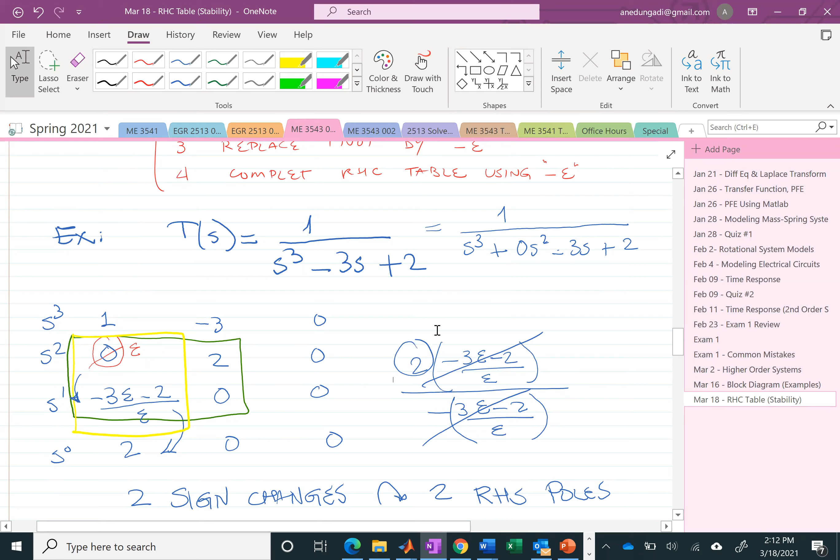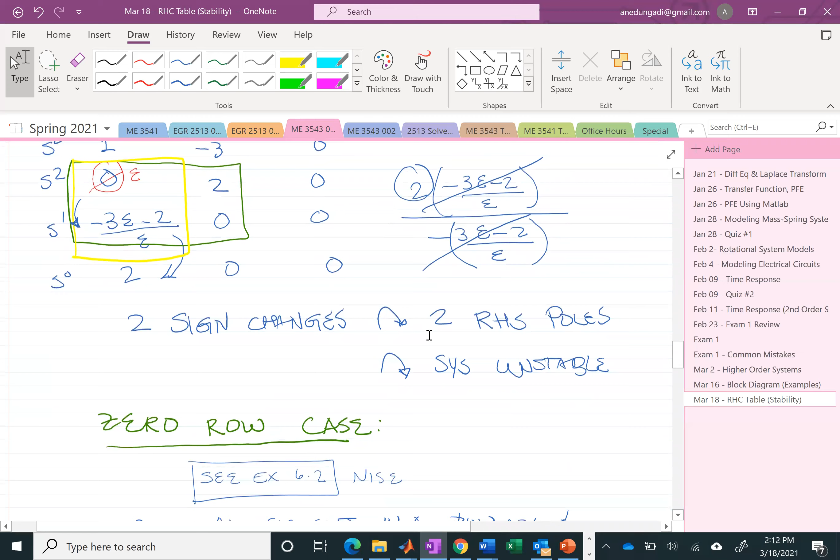Okay. Again, the RHC method is to characterize the stability only, not the pole location, not to tell you what the poles are, but only to characterize the stability of the system. So the sign changes in the first column of the RHC table tell you how many poles are on the right-hand side. Any other questions? This RHC table is really a remarkable way of quickly checking whether the system is stable, unstable, or marginally stable. And in the next class, I'm going to show you the special case of the zero row. When you have a row of all zeros, that's also possible. That's when you can have a marginally stable system.

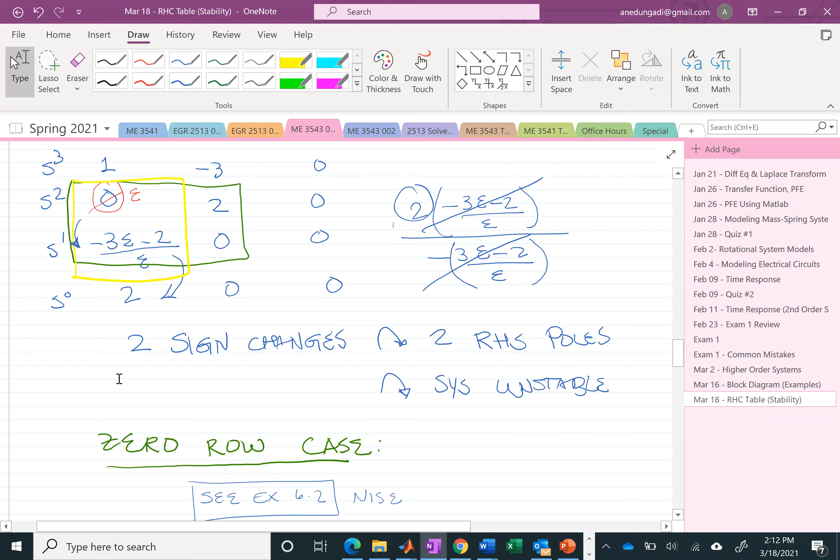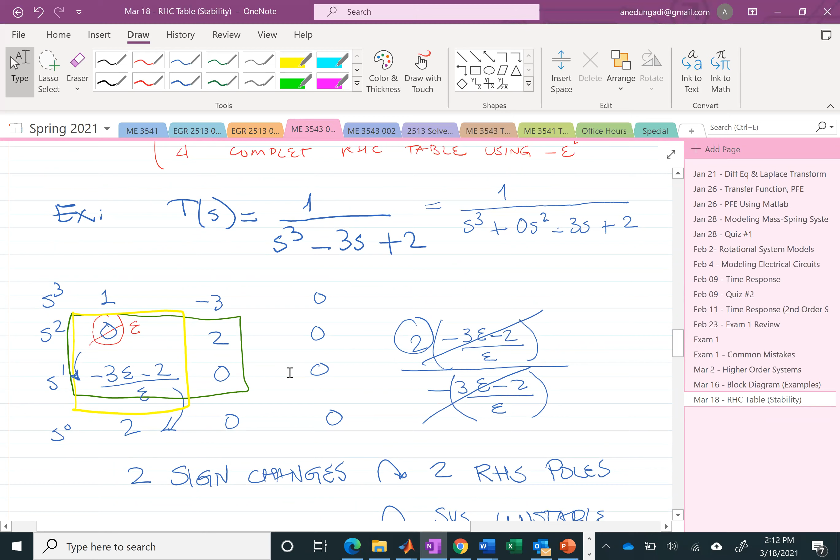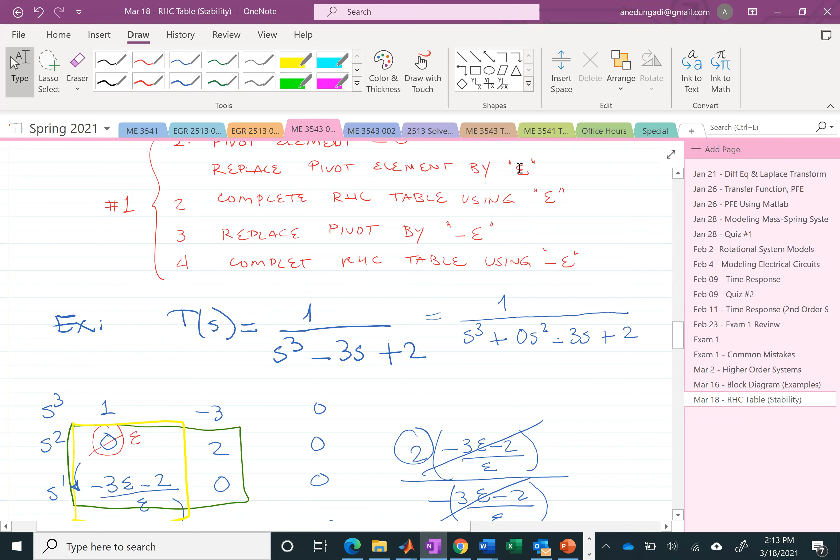Professor, I have a question, please. A little confused about when we are going to check on negative or positive epsilon. Ah, okay. Thank you. For your purposes in this class, all you have to do is replace the 0 with a positive epsilon. Once you replace it with a positive epsilon, then steps 3 and 4 are redundant, because replacing the pivot element with a positive epsilon or with a negative epsilon, you get the same conclusion. So the person who asked me the question about the positive epsilon, is that a little clearer to you now, or did I not answer your question? Thank you. Did you get it? Yes, sir. Okay, great.

So all you have to do is just replace it with a positive epsilon and then continue your RHC table. And if you find that you don't have any sign changes, you're good, your system is stable. But if there is a sign change from a positive to a negative, that is indicative of the number of poles on the right-hand side.

Any other questions? What I would recommend is that you please practice or look at the problems in the book that cover the RHC table for the general non-special case and the RHC table for the special case of a zero pivot element. And in the next class we'll look at the next special case of RHC tables where the whole row is zeros.